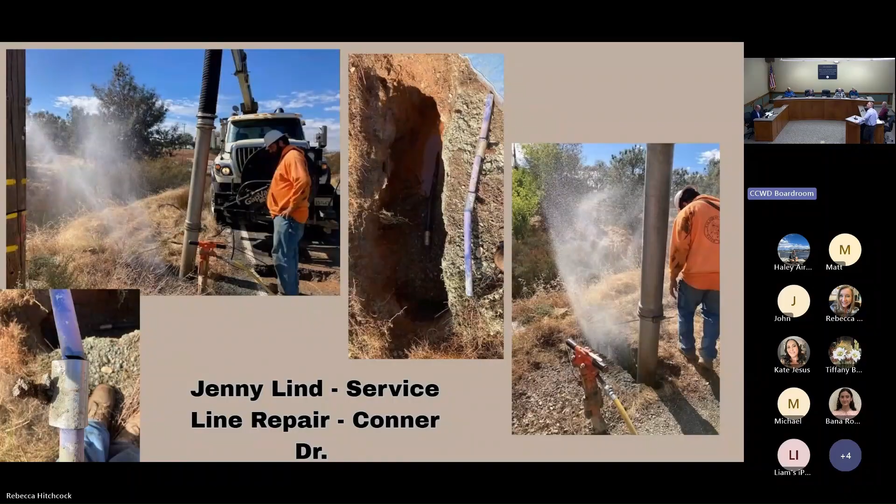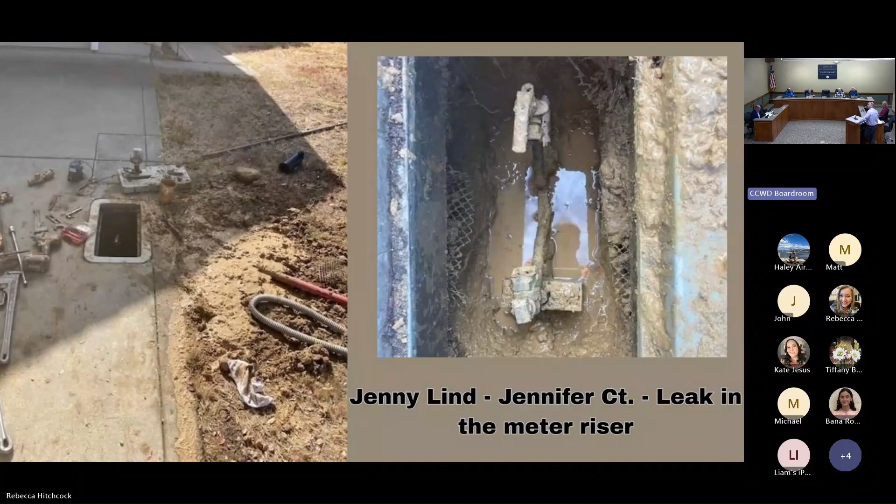This is a case of a somewhat complicated leak. You have a concrete driveway, and the district is sensitive to having to cut into concrete driveways. There's a leak in a riser. A riser takes a service line that's very deep and brings the meter up so it's accessible at the surface of the ground. There's a leak on this riser, so you can see our crew digging and working in the dirt on the side of the driveway so they could get in there and fix the riser. The image on the bottom left shows what happens after they're done, they're able to fix the leak, fix the riser, put the meter back, and put the property back in service.

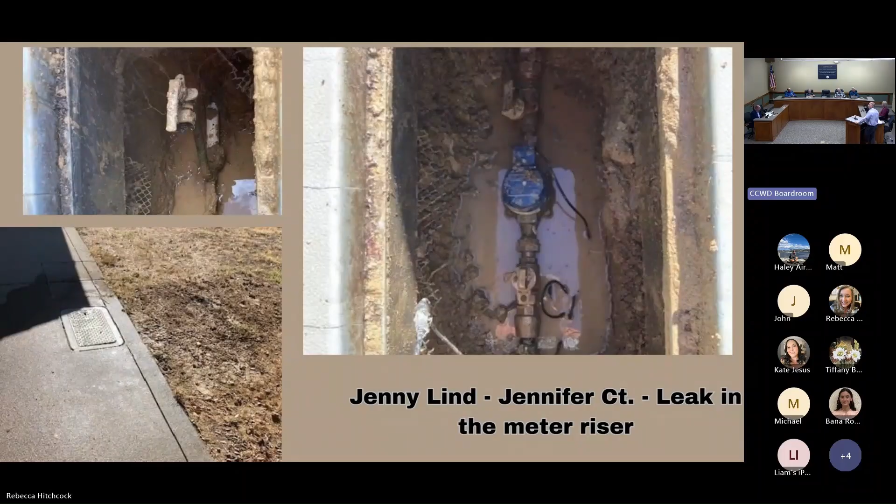Okay, another continual topic of conversation operationally are fire hydrants, their operations, their maintenance, and their replacement.

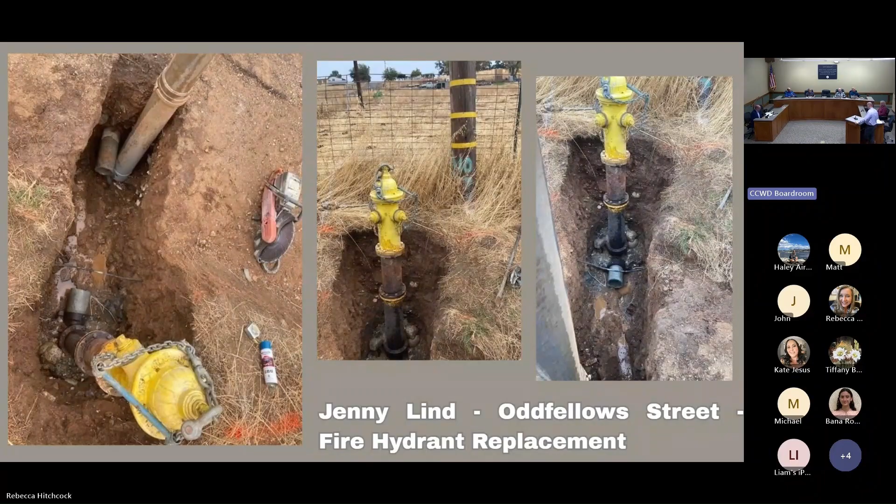Here's Oddfellows Street in Jenny Lind, replacement of a fire hydrant, shown from different perspectives. This is the old fire hydrant being uncoupled from the water line and prepared to be taken out of the trench. In the image on the right you can see the cut pipe at the bottom of the shoe of the hydrant. The image on the left is just a flipped perspective, showing the open hole and the water main next to the pickup tube for the vacuum truck, and the hydrant itself chained up to a crane, about to be taken out of this location.

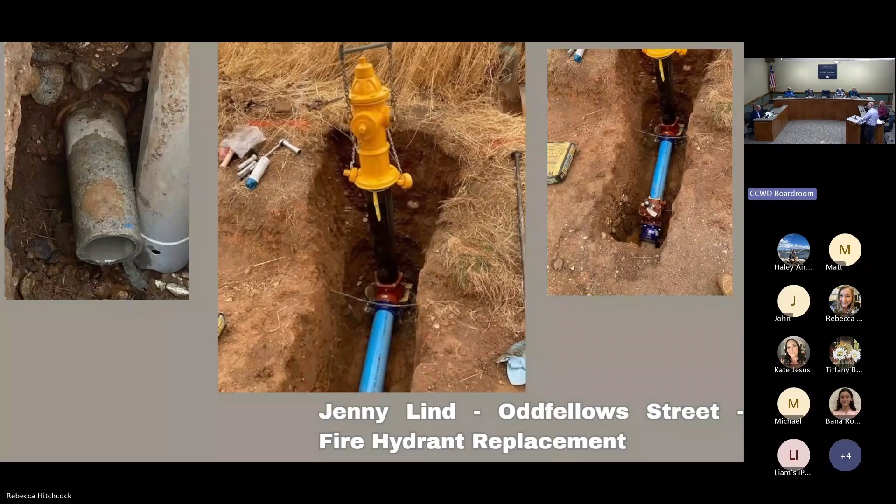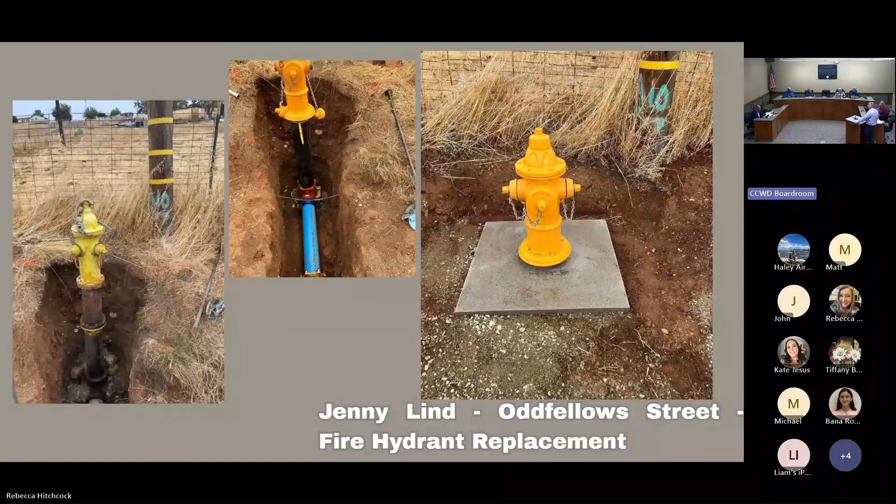Here the image on the right shows the new hydrant being set in service and in place, with the brand new operating valve. A lot of our fire hydrants don't have operating valves, so when they break we often have to shut the main and put people out of service to repair or replace the hydrant. Whenever we do that work, we install an operating valve. In the past they also didn't have sanitary aprons like the image on the right shows, so when our crews are done they put in a concrete pad to make it nice and clean. Great job to the construction crew and the Jenny Lind distribution team.

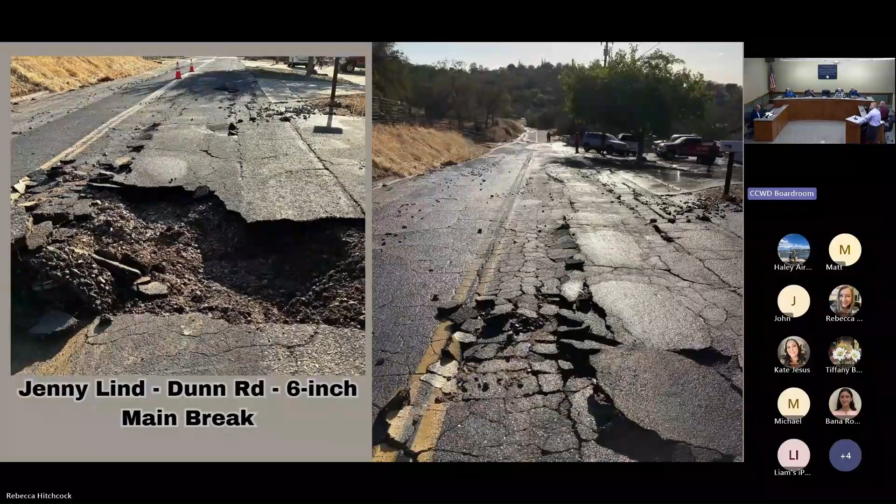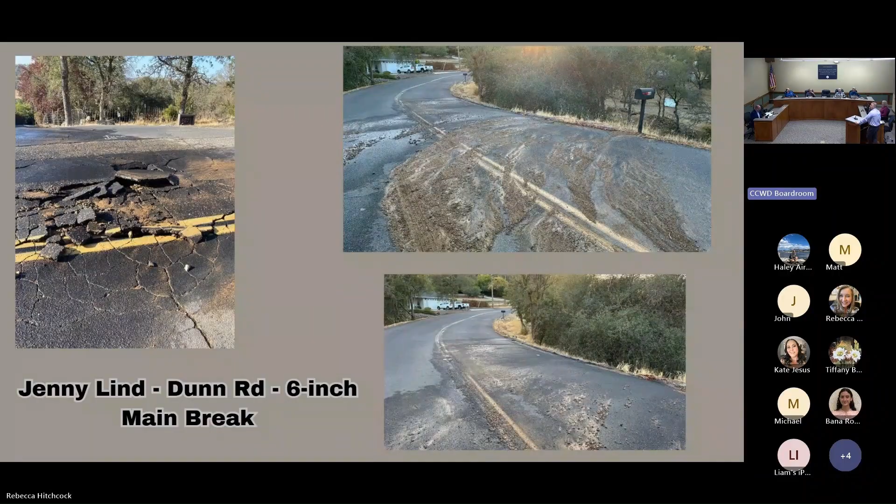So just more images of the asphalt, and then the water pushing debris and the underlayment of the asphalt down the road, this is on the hillside. First things first, as is common in many of our service areas, you have to remove the old blasted rock from the original installation of the main before you can actually get to the main.

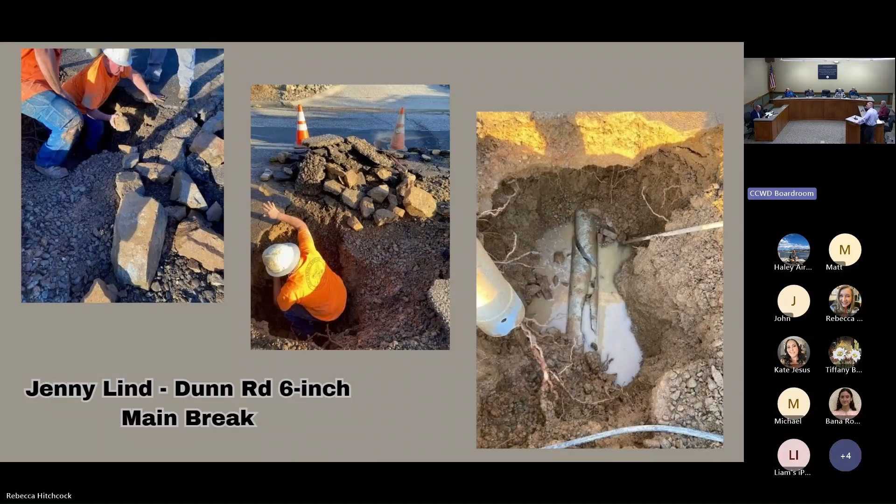So that's what's happening on the left. You've got a member of the crew in the hole that the water main break made for itself, removing large rocks that were blasted when it was originally installed. And then you can see the break in the image on the right. Still trying to determine how this broke.

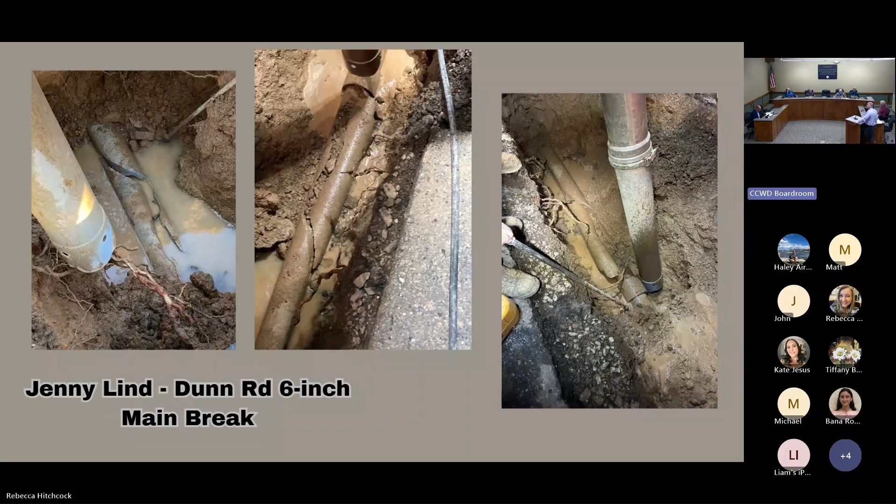This is off an offshoot of the A to B transmission line, the currently in service transmission line, not the new one that's being constructed. We're not sure completely why this portion of the main blew up here. Just various images of the break, and then images of the work.

So you can see a member of the crew getting down in there, pulling the top of the pipe out, which is in the center image. And then the folks are continuing to work. You can see the lighting that the gap backs provides to the trench.

This is to illustrate that oftentimes when you drive by a crew and there are folks standing there, they might look like they're not doing anything, but in this case, Curtis was doing a critical job with flashlights. Because even though we have overhead floodlights, to be able to see actually what you're doing, it's nice to have it highlighted. So somebody that understands the work that's taking place is able to anticipate what you're going to need, and they'll light up the torque wrench, they'll light up the cutoff saw, they'll light up the pipe, and that's what's happening.

The pipe is set print up, as is our engineering specifications. You need to be able to read what's on the pipe. And then our crews actually go back in and lock in a locating wire to that section, so it can be found later. So then here are images of the backfill and compaction.

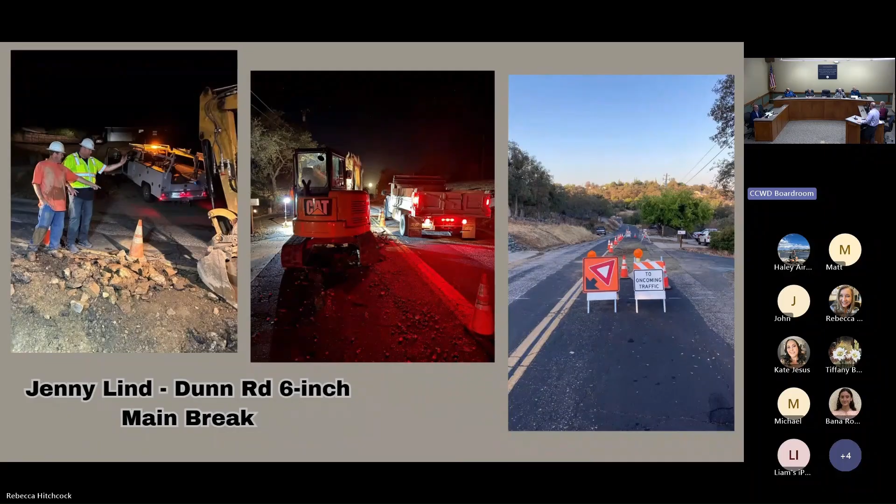Yeah, we just basically sectioned it off. And then the county met Pat and members of the crew out there on Monday when the paving was happening, kind of took stock of everything that was going on, and then showed up afterwards and gave us a thumbs up.

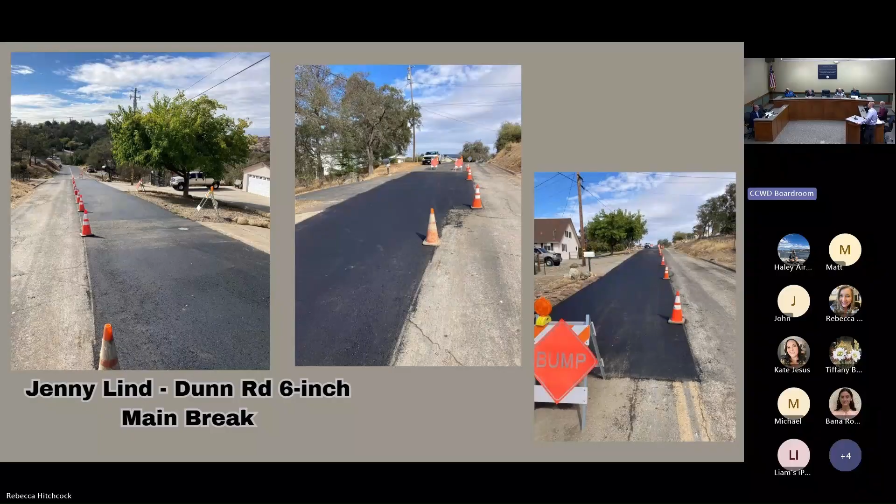I have a question about that yellow suitcase light - you said that is Pelican lights, with the gap back? Well, so we have lights on the pickup tube of the gap backs, and we also have these lights that are super handy, that are battery powered boxes, and you can telescope the light itself. And so we have those, and then we have...

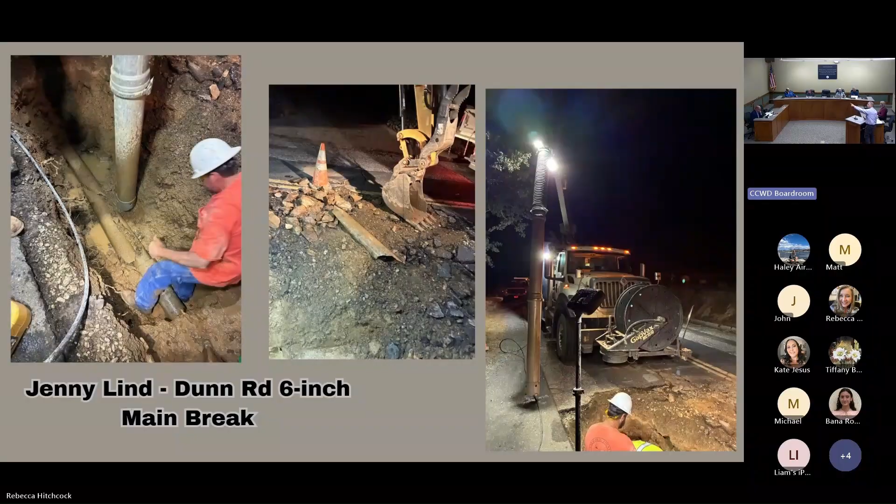Let's see if you can see it. There's one right there in the image in the center. They're great. So how many of those do we own? I'm not sure, maybe 4. Okay, and you say they're battery ready, rechargeable? Yeah, what a great tool. And then you can see the light on the tube of the gap backs there.

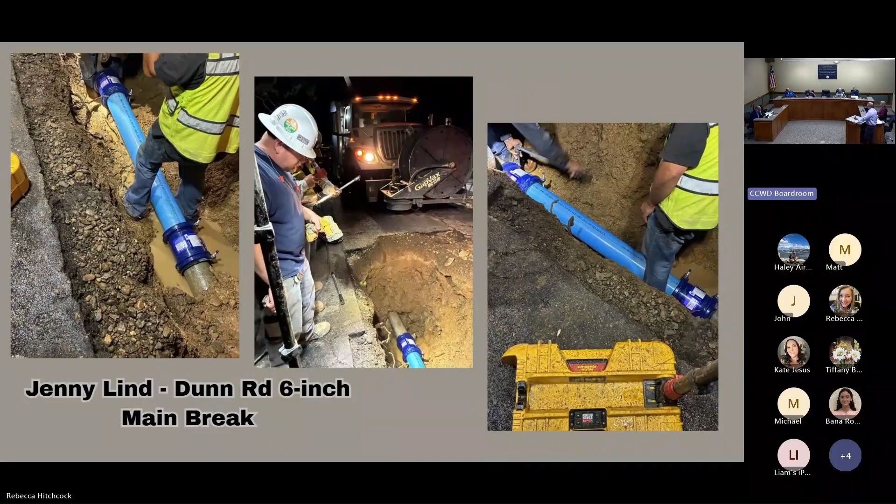Did we use that to power the electric vehicle? You know, we attended a Carb Expo in Oakland last week. There are some little street sweepers who might be able to charge.

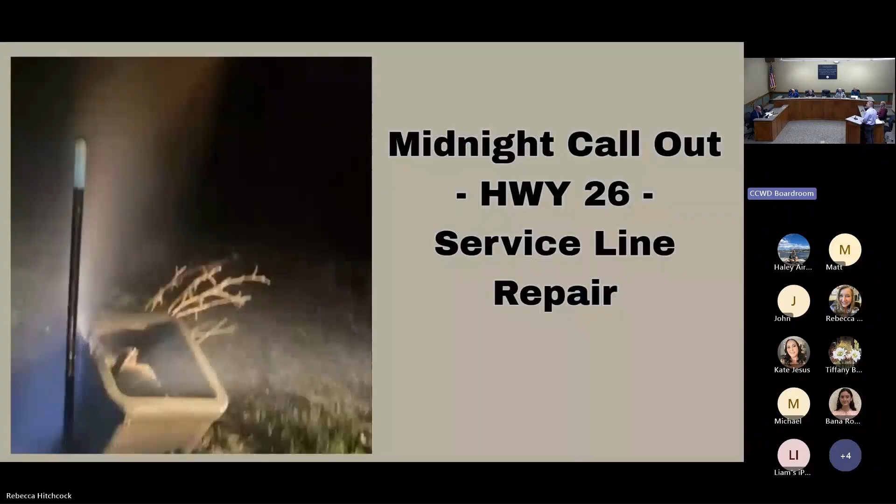So, foray into video here.

So imagine you're the on-call person. You get a call at midnight for a water line break. This is kind of what you're going to see, and this is what you roll up on. This is a service line break at a meter box, shooting up 25, 30 feet in the air.

It's midnight, you were snug in your bed. Yeah, it's cold. Hats off to Nick and Eli. I saw that in Yellowstone. I bet you did, yeah exactly.

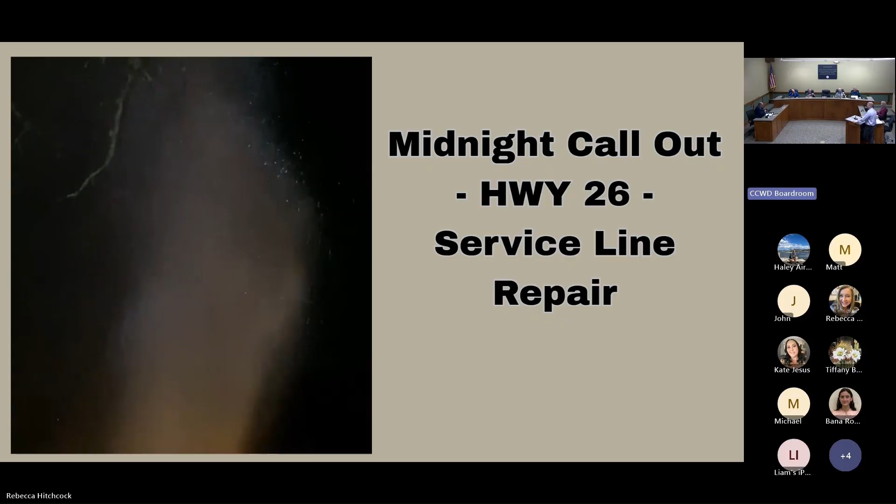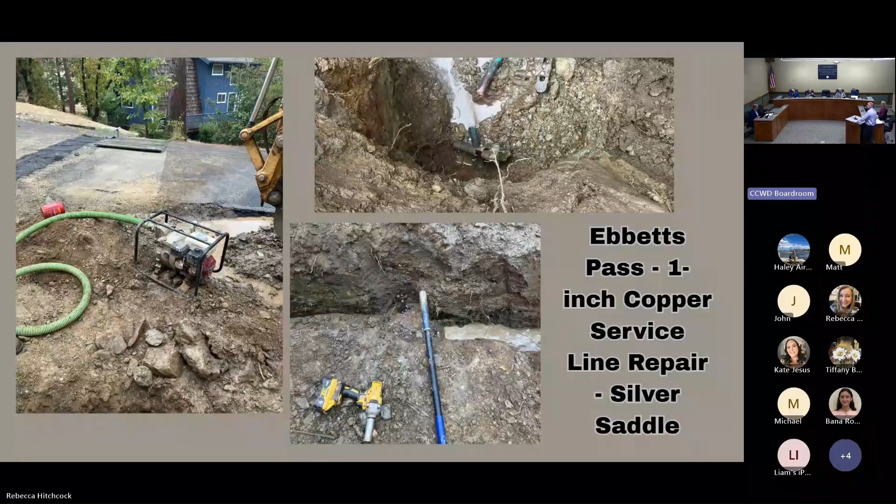As you guys have heard, so much undergrounding work is happening up on Ebbetts Pass, resulting in some service line breaks and main breaks. Here's a 6-inch AC main repair. You can see, often asbestos cement pipe, AC pipe, the image on the right, will just break in a perfect snap, almost like a shear break.

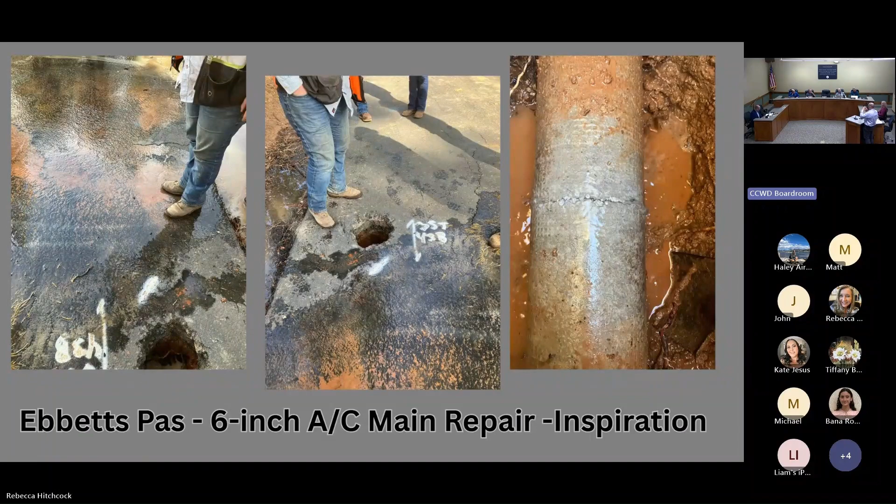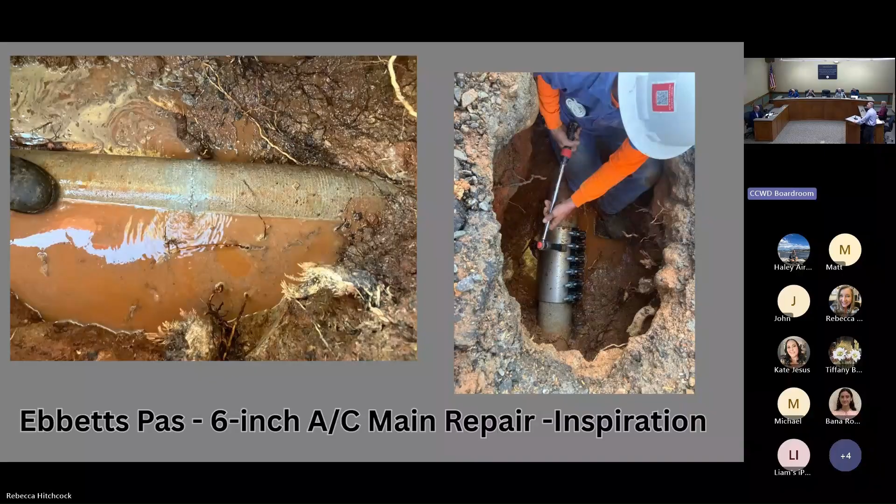And a full circle clamp does the trick. So you get that, what is that, a 6-bolt full circle clamp in the image on the right, get in there, throw that on the main to back it up.

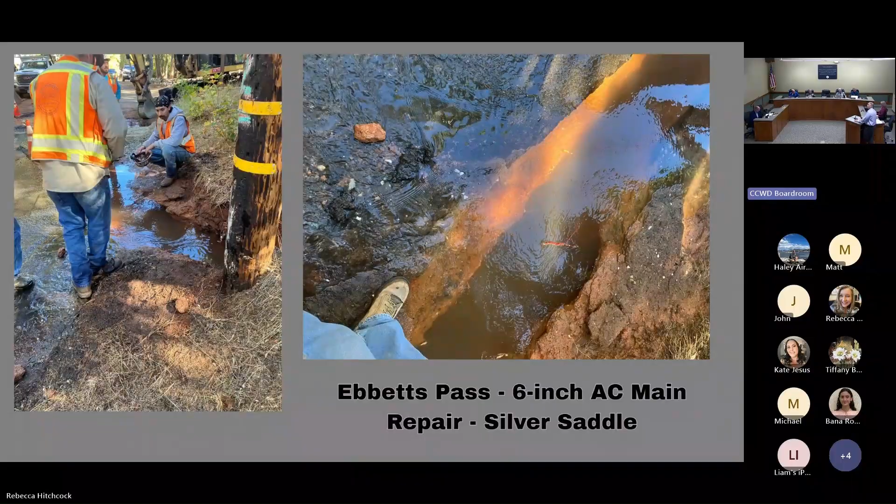Here's an example of that undergrounding work, whether it's our mismarks, or it's a line that deviates into an area we had no idea there was a line, or whether it's a flat mistake on behalf of PG&E's contractor. It always results in a ton of water coming out of the ground. You have 6-inch water mains. You can see the image on the left with the subcontractor for PG&E kind of regarding their work there, and then the water flowing everywhere in the image on the right.

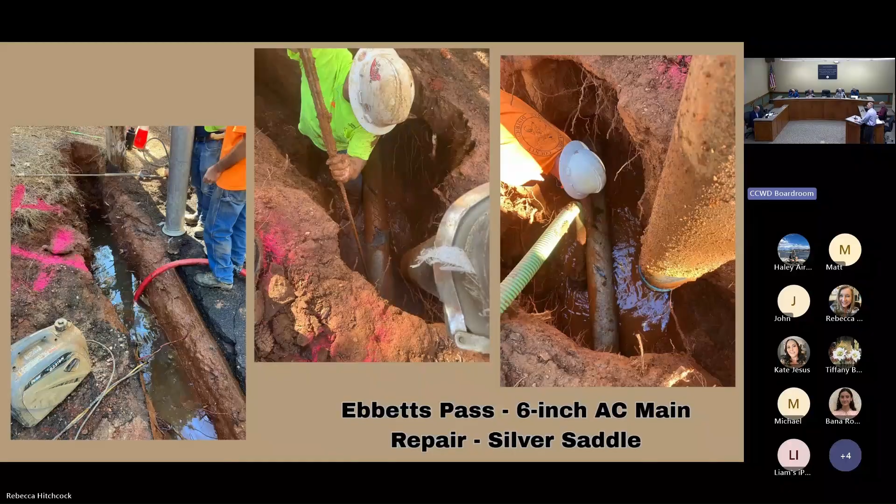And then our crews are able to get in there, identify what happened, clean the pipe, make the cut, and then repair with a Hymax coupler. Those are the blue ones, they're really snazzy, just a 1-bolt coupler. You torque those to spec, and then we'll connect the water main to the C900 PVC section that we installed to make the repair.

What's the PSI on a 6-inch line? Well, it varies greatly, depends on the type of pipe, but we can have anywhere from 170, 180 PSI upwards of 300 plus. That variation even within one system? Absolutely, right, it's kind of inherent to the foothills, we're going to have pressure variability.

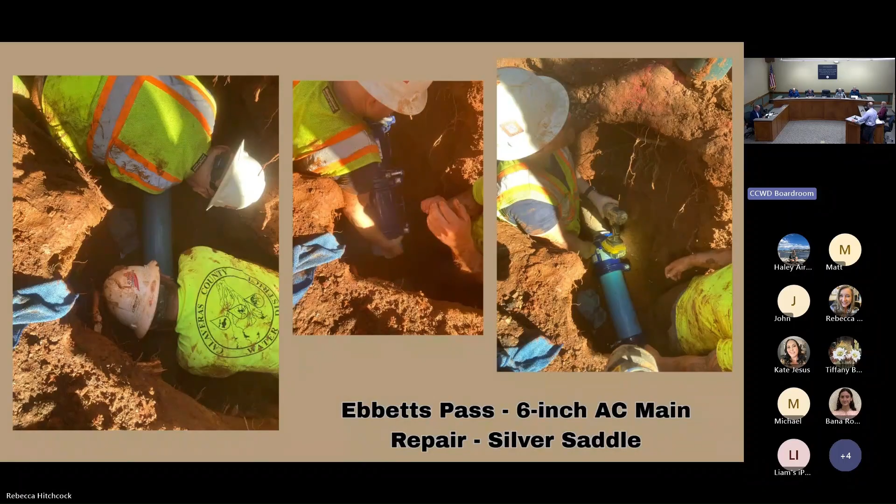So you can put water to the top of the bonnet, or take water off the bonnet to allow it to float and move. You go from an area of high pressure to an area of low pressure by pilot controlling how the water sits on top of the bonnet.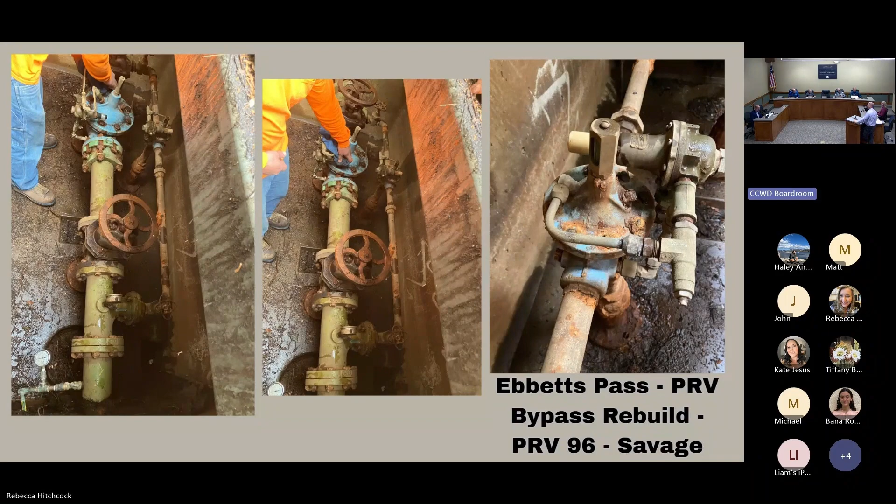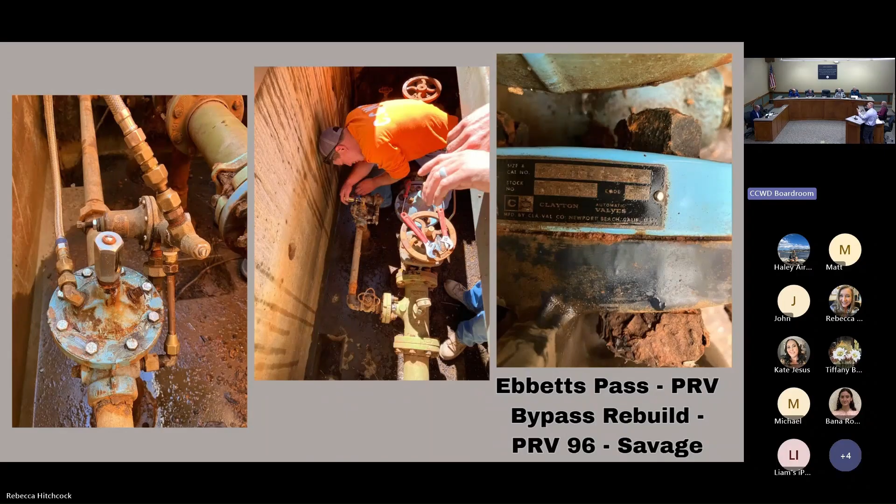You need some electricity for that also. Essentially what our guys are doing here is taking apart the pilot control. You can see Bill in the center of the picture, he's unbolting that, and they're going to replace the internal components. There's a diaphragm, you can see in the image on the right after the bonnet has been taken off. There's a seat ring, a tube, and a stem that the diaphragm can float on.

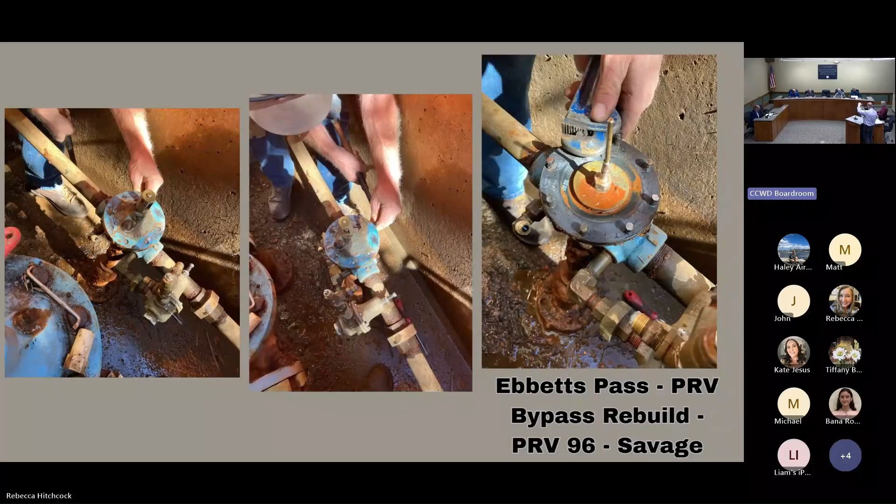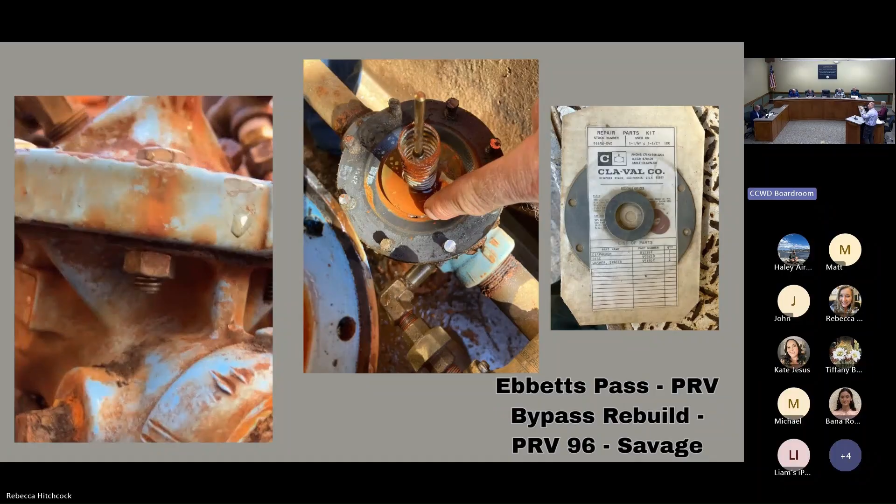You can see in the image on the left there's water coming out of this small pressure reducing valve, but we're not exactly sure what's going on, so you've got to take it apart. And you can see in the center picture that there's a hole in the diaphragm, so it's going to equalize pressure across the diaphragm.

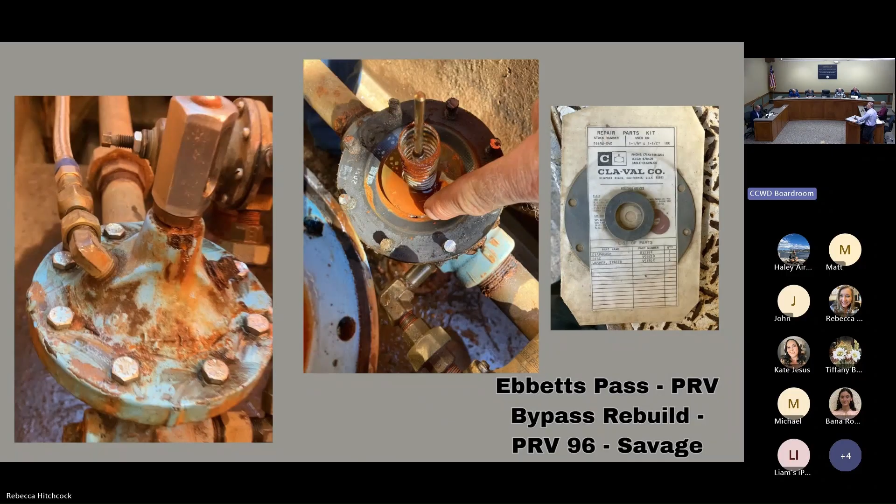So if you're up in an area where elevation variability is all over the place, and you equalize pressure, that's a big deal. You can have 150 coming in, and you're breaking pressure to 50 going out, and then this diaphragm equalizes pressure, now you're at 200 down here. So it's really important that our folks keep an eye on all of these pressure reducing valves and maintain them so that we don't blow hot water heaters. We're not, that makes us really unpopular.

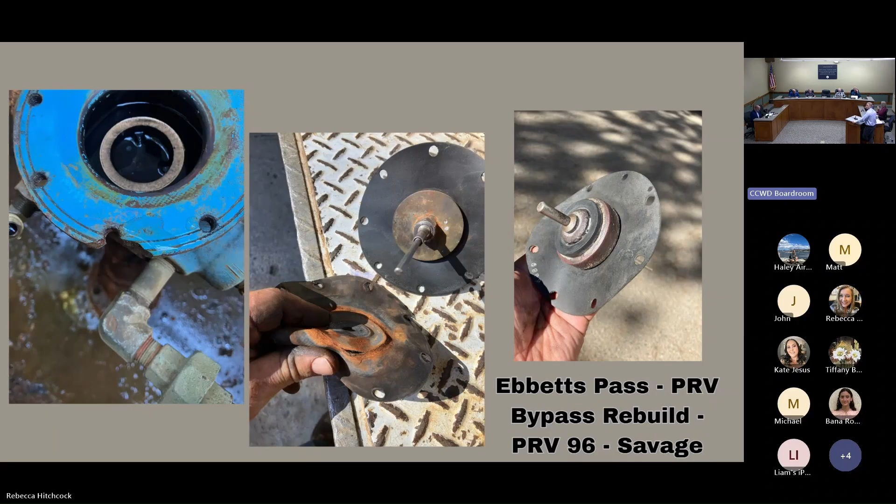So you can see the brand new diaphragm being installed in the center image, and the operator's holding the old one that's bent, so you can see the tear. Often the pilot controls allow us to get in there and make a repair before results become catastrophic. There's even the small control in the image on the left - you can see a small diaphragm that's taken out and reinstalled.

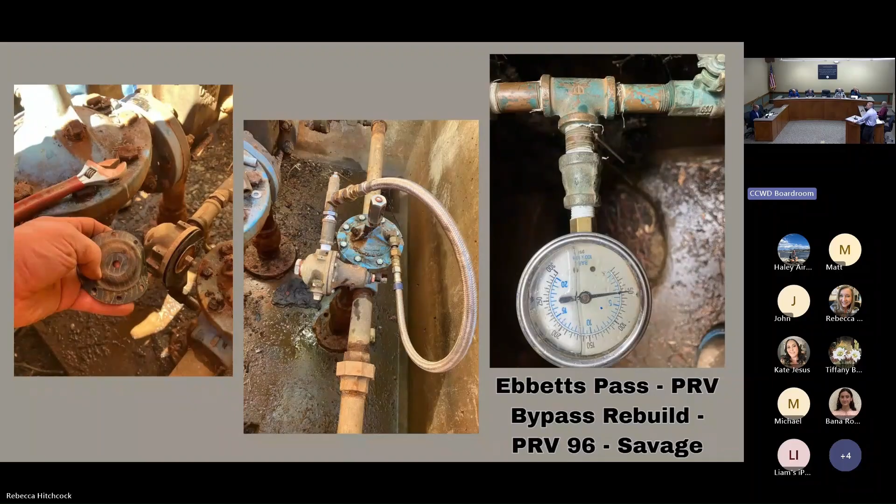So this is PRV 96 of 100 plus PRVs in the system. Kevin's talking today - we're talking about the Arnold Wastewater Master Plan. Kevin and his team are also working on the Ebbets Pass Water System Master Plan.

One of the things that really helps inform the master plan is the hydraulic model associated with the distribution system. To answer questions about how the system functions hydraulically, we need to conduct fire flow tests. There's an added benefit too - if you fire flow test one hydrant, it acts as a surrogate for the 5 nearest hydrants, so it really benefits the fire departments as well.

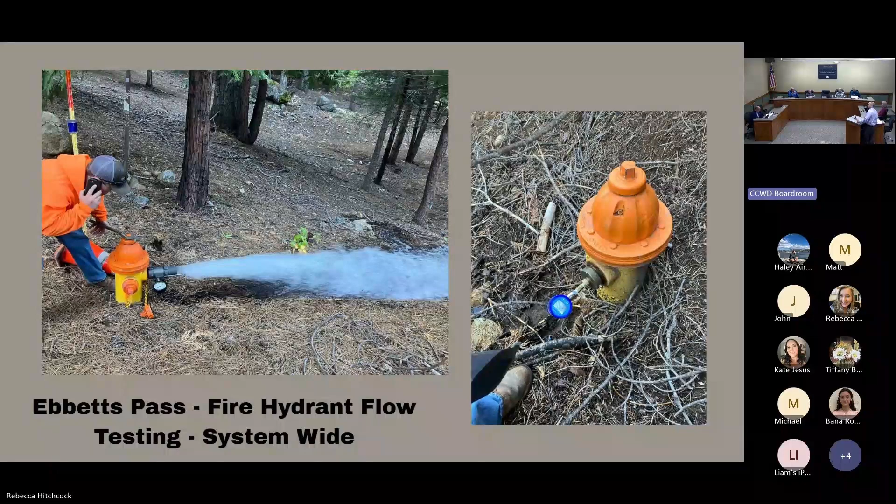So if you can flow that hydrant at 2,000 gallons a minute, but at 1,000 gallons a minute is where you get to 20 PSI, we're going to let the fire department know - hey, if all bets are off, obviously you're going to do what you've got to do, but functionally, to keep the system safe, you need to flow like this. So the topic of how much a fire hydrant can flow gets really complicated really fast.

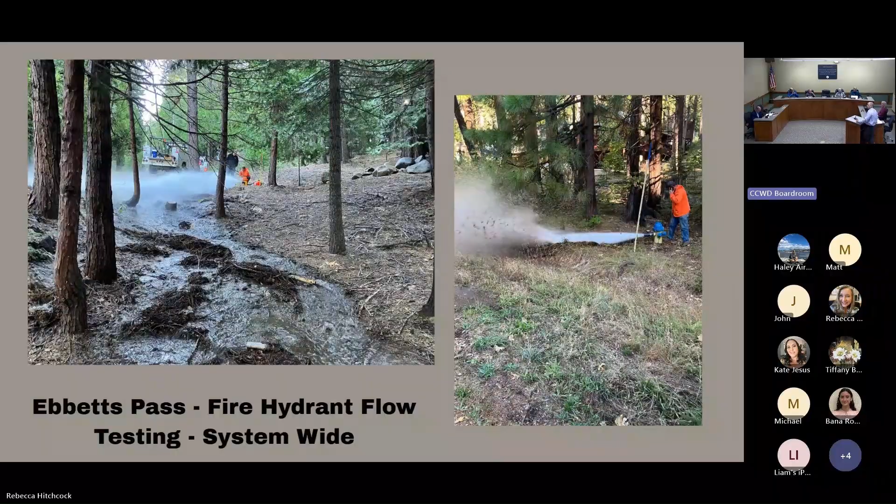Here's an example of what can happen when you flow a fire hydrant to understand its capacity - you have to find some place for all that water to go. You can see that, luckily for a lot of these hydrants, it was in the forest. For some, our guys are super creative - they put down tarps so it doesn't damage the area. And this thing is ripping across the road.

Meanwhile, there's somebody at a few other hydrants checking the pressure, folks talking back and forth. You see Bill was on his phone saying, okay, I've equalized, I'm at pressure - what's that hydrant? All of that information goes into the hydraulic model, which will be incorporated into Kevin and his team's master plan.

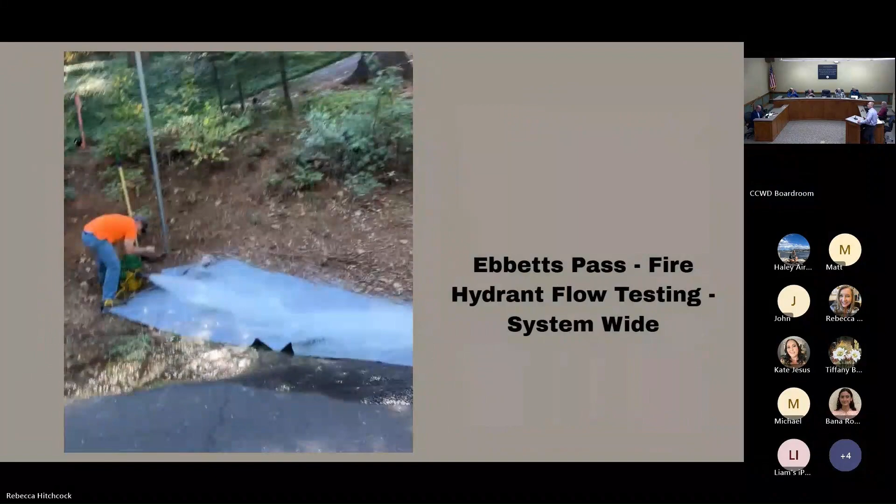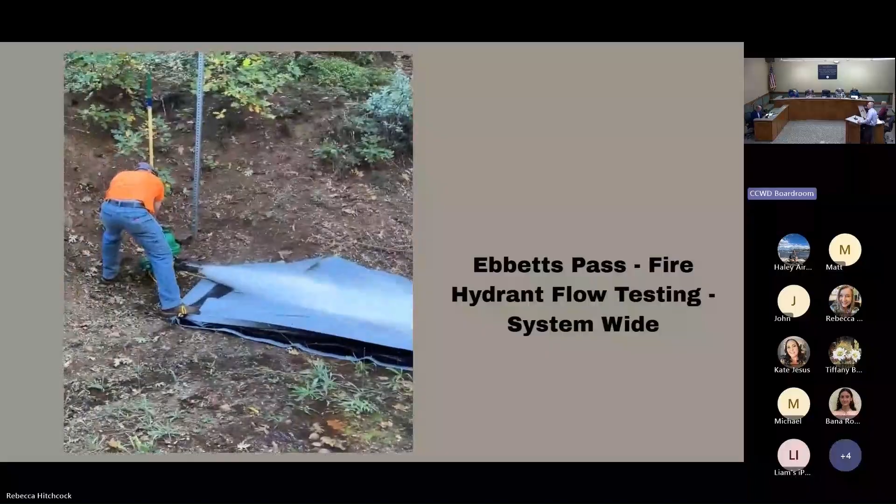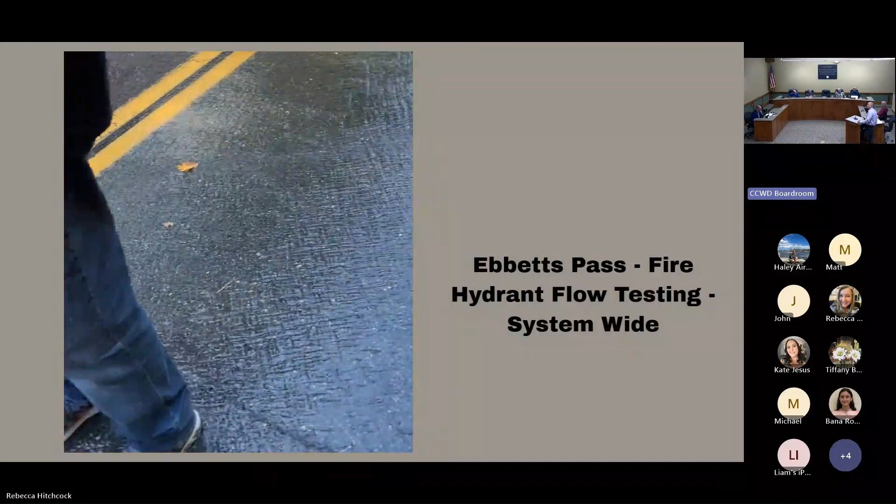And then that operator there is kind of going, okay guys, like when is somebody going to call me and tell me to stop? The whole ground's shaking, everything's rattling, there's a lot of pressure, a lot of volume. Pat's there, keeping things in check. It's quite the event - hats off to everybody that was involved with fire flow tests.

Here's another example of that creative slip and slide for fire protection.

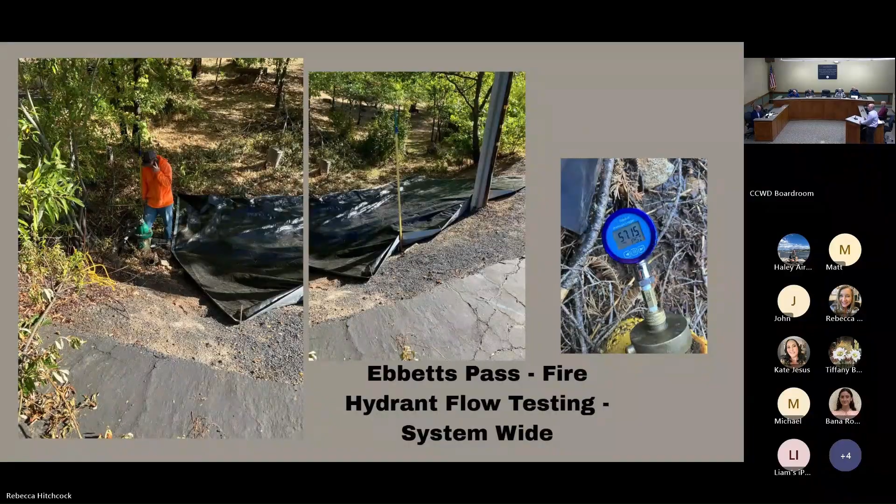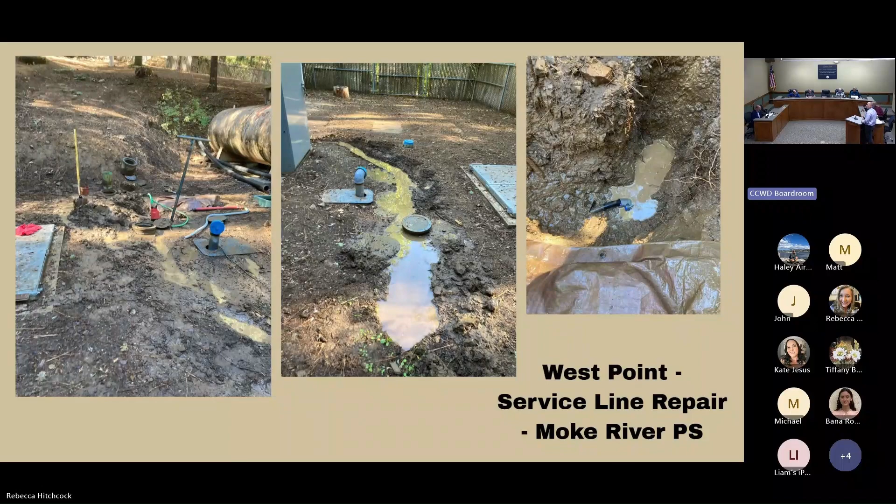All right, so an example of our crew up in West Point's work - Doug does an excellent job up there. This is a service line to the Moke River Pump Station. This is one that can cause definite concern when you see water flowing out of a pump station - you're not sure if it's the main or the raw line, since there's also a raw line and a treated line coming through this area. Doug was able to get in there, identify the issue, and make a repair.

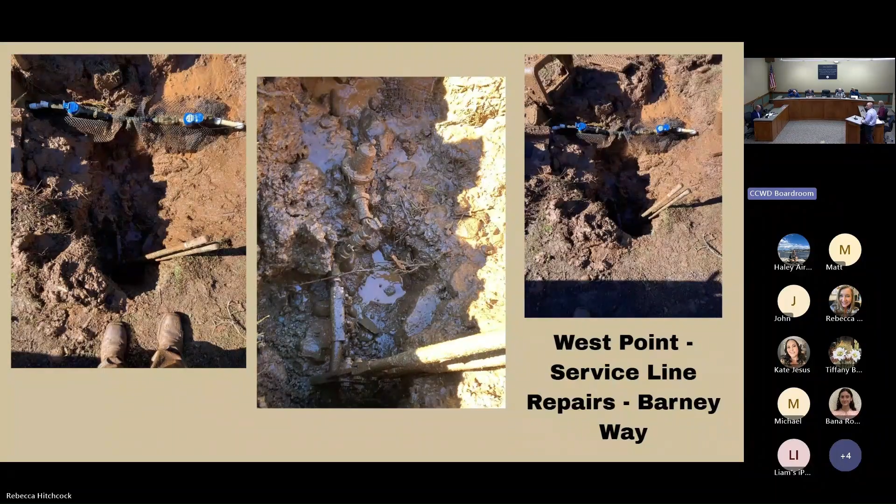These are 3 service lines connected to a meter cluster at Barney Way. Here a heavy vehicle drove over the meter boxes and broke all of them, broke everything. Our crew came in after hours at the end of the day, made the repair, fixed all the services, and put everything back together. Here's the finished product where all the meter boxes are set in.

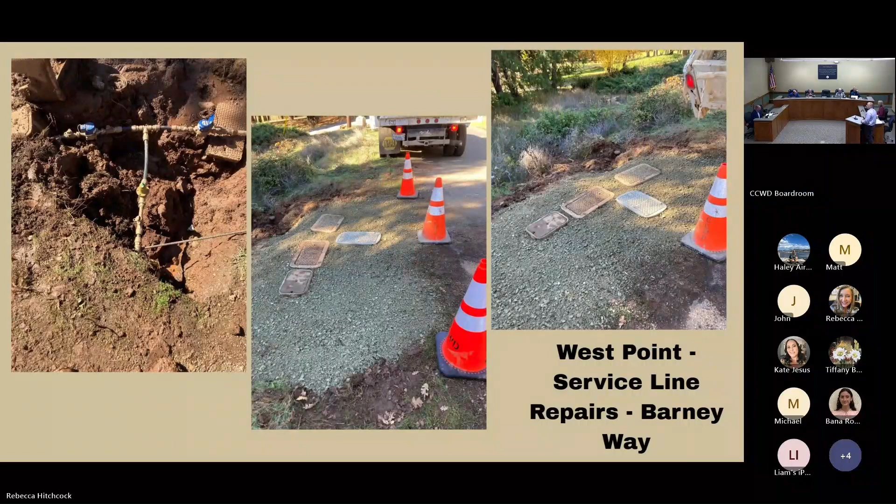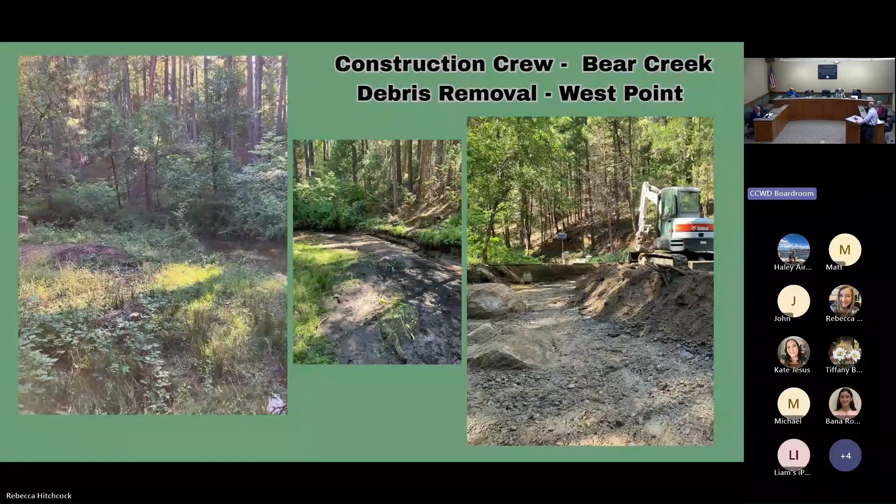Speaking of atmospheric rivers, we are expecting almost 5 inches of rain over the next 4 days. Are we ready for it? We're ready. We're not excited though, but we're ready. Ops is not excited about it. Andrew's thrilled, but Ops is not excited. Yeah, it's usually like that.

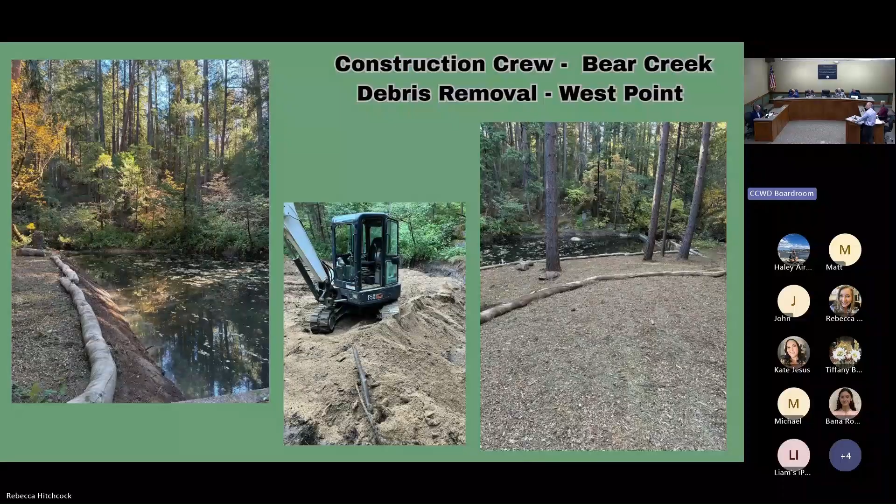And then the stormwater protection implementation—the image on the right after this work is done, just hats off to the guys, it's super clean work. Fish and Wildlife was out there. We had what's called a 1602 permit, and they flipped that permit around super quickly. They were really happy with the work the guys did, and we are too—they did a fantastic job. You can get a better image here of the diversion. You can see the valve on the left, which diverts the water from a little reservoir there, and it flows into our Bear Creek pipe, which goes down to our West Point treatment facility and the Bummerville regulating reservoir.

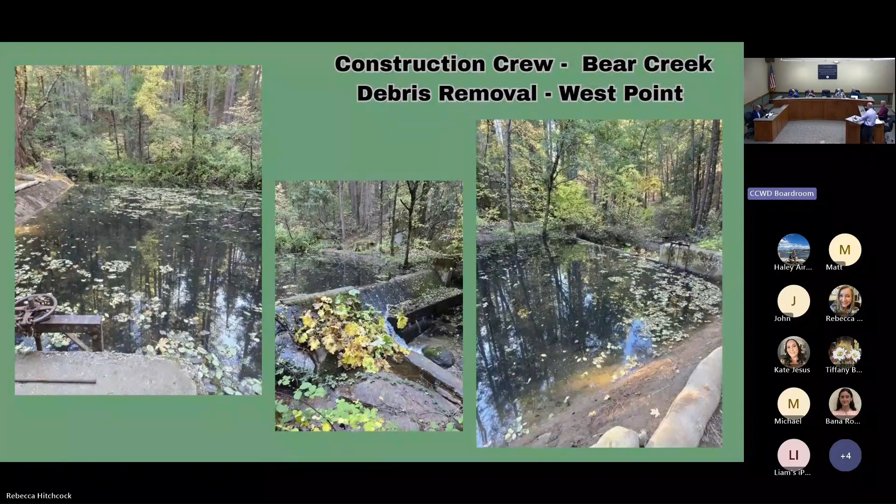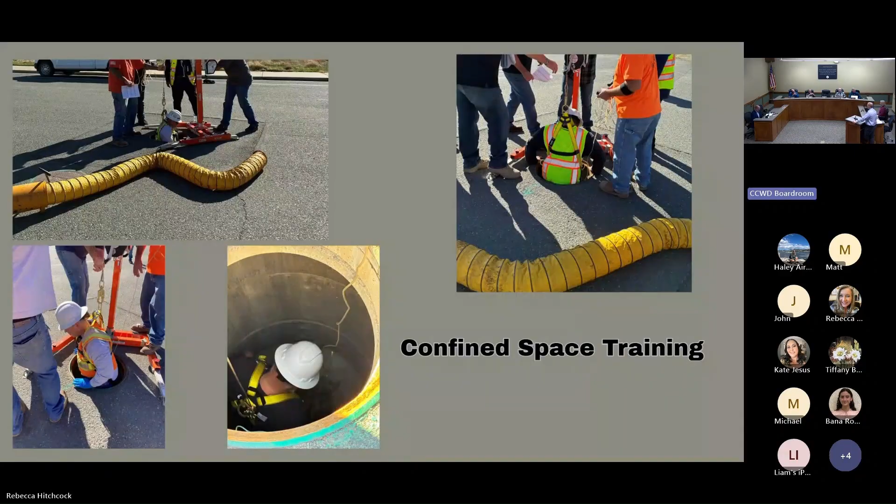When you're in a confined space work event, you have 2 folks outside and 1 person inside. The person inside is called the entrant, and then you have the attendant—you can have multiple attendants. They're checking on the entrant the whole time, talking back and forth via radio or just hollering, watching the person, and monitoring and talking about gases. They'll have a gas sniffer, with a tube down, in this case a manhole, where you can gauge what's going on with the gases. Then you have an entry supervisor, who is controlling the whole operation. Everybody that works in the field was able to participate in this training. Fabulous training with OSTS was the group—they did a great job.

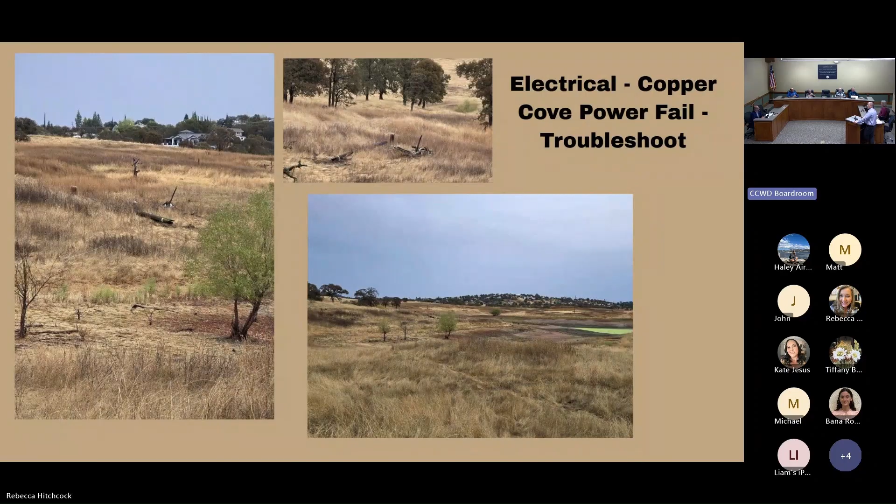Our electrical team covers a vast and diverse array of work efforts. When the power goes out, oftentimes we call them because we look around and think, hey, the neighbor has power, that facility has power, but my treatment plant doesn't have any power—what's going on? The electricians drive out into the field at our property at Copper Cove and say, it's kind of hard to see, but in the image on the left, a power pole just fell over. Power's out. So they actually act as a liaison with the PG&E Troubleman, doing a great job coordinating their work, making sure the site's safe, and working with PG&E to get us back in action as quickly as can be.

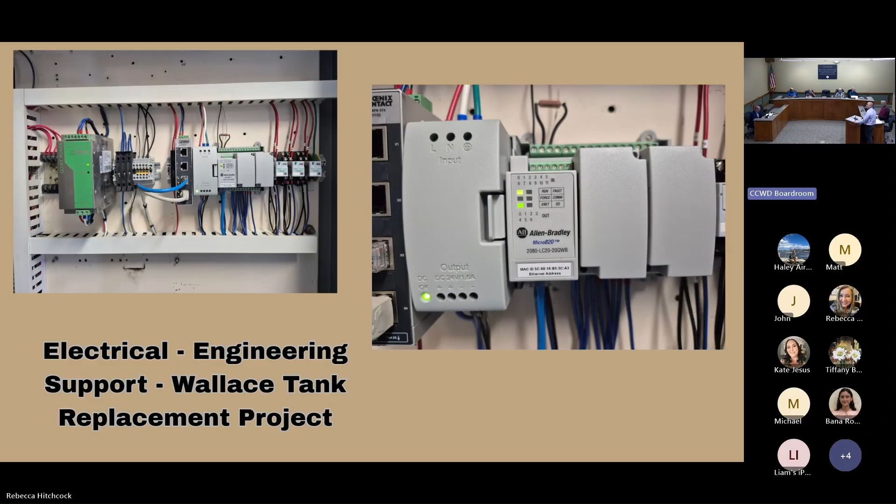Relative to some of the capital improvement projects happening—in this case, a Wallace tank replacement over in Wallace—our electricians need to understand the equipment that exists there in anticipation of replacing equipment to maintain it. Is it going to have a different kind of float? Do we want to put telemetry on top of the tank? What do we want to do? That's what this is all about. You've got electricians who go out, assess the equipment, and create a replacement list of equipment so we can plan for that in the future.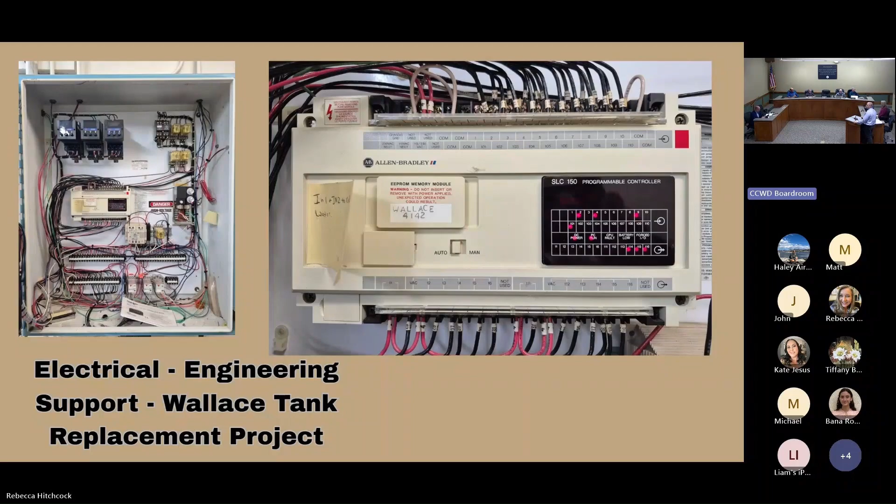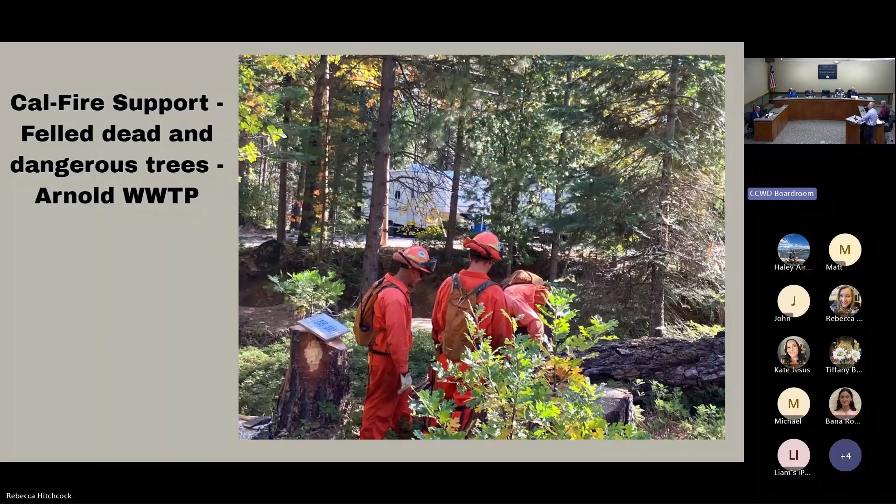CAL FIRE support—there were a few dead and dangerous trees at the Arnold wastewater treatment facility near Tanwood Mobile Home Park. The CAL FIRE crew did a fabulous job coming in and taking out approximately 5 trees. You can't really see it in the image, but that sign says 'dead tree' on the stump there. I do want to acknowledge that's the crew, and that's the tree fallen from CAL FIRE—this is the Vallecito camp. They do absolutely great work for us.

I'm glad you did that. Ron didn't want a resolution, didn't want a presentation like that, but what a huge part of CCWD for a long time. Yeah, I'm glad you're calling him out there. Yeah, he got a throne out of it.

Have we ever been able to hire any of those young men that come out of that program? I don't believe so, but we have been able to hire folks from similar facilities.

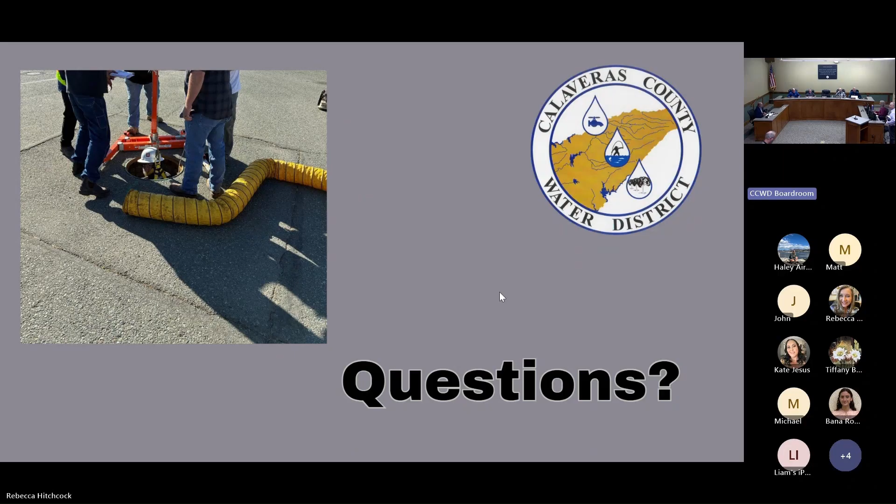Okay, let's listen to Mike. Mike Rogers, Valley Springs. Thanks again, I always enjoy the photos and everything. And I have complete confidence and faith in your crew to do this work.

But my question for you is, last year you had developed this dashboard. Do you have plans to bring the dashboard back on a periodic basis? Because the thing I look at as a ratepayer is the incident rate — how often are we sending crews out at midnight? Because that drives overtime, and overtime is a budget line item that can sometimes get blown out of the water. So can you maybe comment on the dashboard?

Absolutely. For those who don't know, in our work order system we have what I call the dashboard, which breaks down all of the work orders completed by the different crews, and whether it was emergency work, preventative maintenance, or scheduled work — what the nature of the work was. We can see that, and we can also push up against a heat map of where the service line repairs have taken place, or any of those issues.